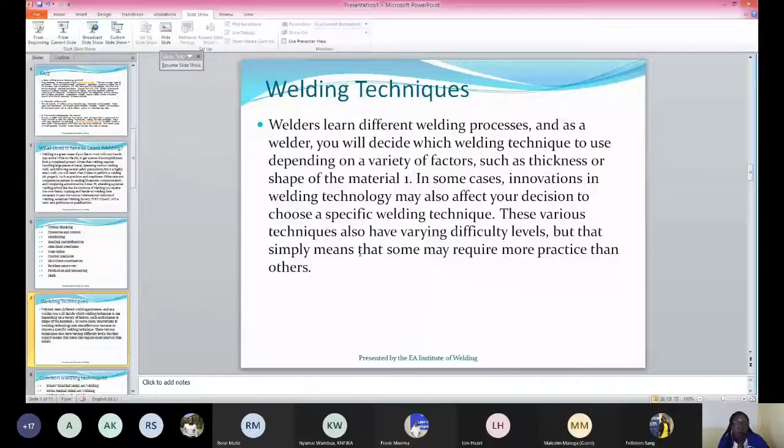The most common welding techniques are shielded metal arc welding, manual metal arc welding, metal inert gas welding, tungsten inert gas welding, high frequency TIG, and flux core welding, which is mostly used in arc welding, structural welding, pipe welding, aircraft welding, thin alloy welding, and pipeline welding.

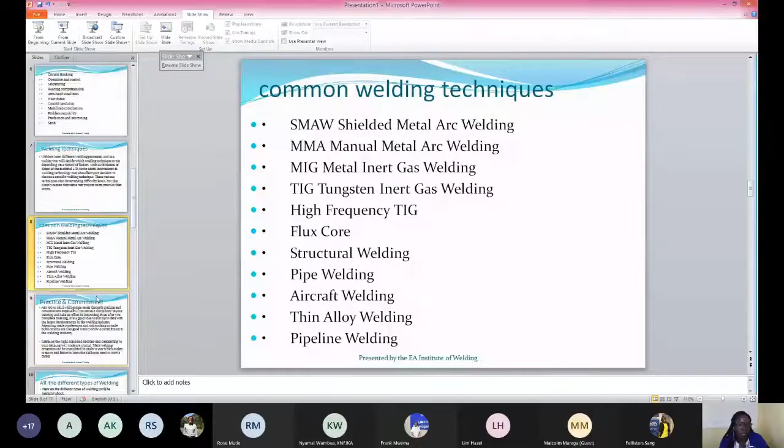To be able to do these common welding techniques, there needs to be some practice and commitment, because any job or skill will become easier through practice and commitment, especially if you remain disciplined in your training and take an effort in improving.

Even after completing training, it's a good idea to stay up to date with the latest developments in the welding industry - attending trade conferences, subscribing to trade publications, attending webinars like this one, and following industries that need welders are all good ways to show commitment to the welding industry.

Learning the right skills and abilities and committing to your training will make a crucial impact in your career. Many welding programs can be completed in under a year, which makes it easier and faster to learn the skills you need to start your career.

I would like us to look at all the different types of welding. I'll leave the PowerPoint presentation and take you to something else. These are the types of welding processes we're going to go through - there's more than one way to fuse a metal, so we're going to be looking at them.

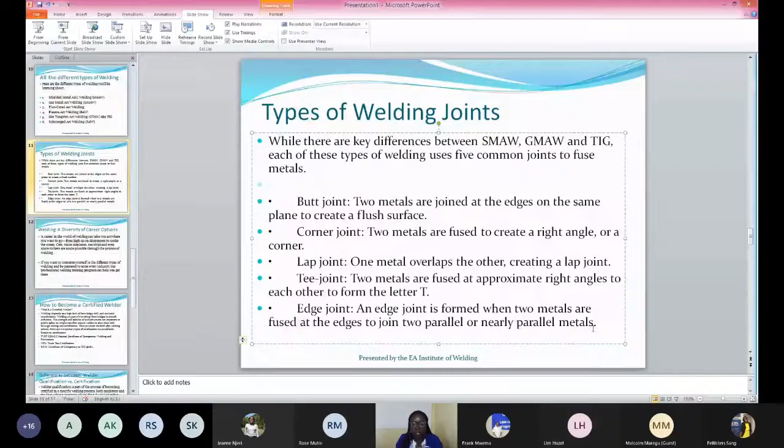We have the butt joint, where two metals are joined at the edges on the same plane to create a flush surface. We have the corner joint, where two metals are fused to create a right angle or corner angle. We have the lap joint, where one metal overlaps the other, creating a lap joint. Then there is a T-joint, where two metals are fused at approximate right angles to each other to form the letter T. And we have an edge joint, formed when two metals are fused to join parallel or nearly parallel metals. I will share an image of this shortly.

So these are the welding positions we're talking about, which will tell you about the different joints. We have fillet welds and groove welds. In a flat position, as you can see, this is how it looks: throat of the weld, which is vertical, and axis of the weld position. We have a horizontal position here, a vertical position, and an overhead position. As you can see, this is on a fillet weld, meaning it's on an angle. And all of these are the positions you have to weld in to be able to produce a fillet weld.

As the East African Institute of Welding, we ensure that before you reach position 4F, you have to start from position 1F on a fillet weld, a plate weld, or a butt weld. As you progress from 1F, it is assessed, and finally you can move to 2F, 3F, and 4F. Same way for groove welds, you start from 1G, 2G, 3G, 4G, and so on.

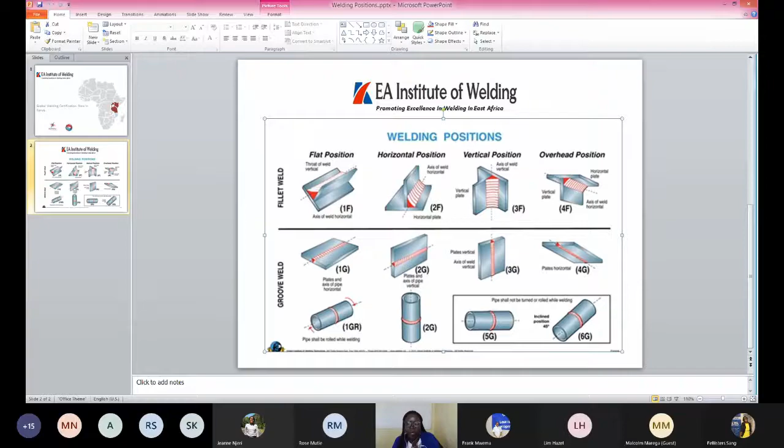We will go back now into the presentation I was focusing on before, and now we'll be talking about the differences between things, and first how to become a certified welder.

There's a diversity of career options that a welder has. A career in welding can take you anywhere you want to go, from the skyscrapers, building the Nairobi Expressway, or the tallest buildings in Africa, to under the ocean doing submerged welding, cars, trains, planes, sea ships, even space rockets if made possible. If you want to immerse yourself in the different types of welding, you have to be prepared to enter every industry, and this has to be done through a professional welding training program.

Sorry, I just noticed that I'm not sharing the screen.

So a diversity of career options, just as I said, that's what I was talking about. To attain all of this, you need to have gone through a professional welding training program to help you get there. And the way to get there is to become a certified welder.

How to become a certified welder. Maybe we can discuss what a certified welder is. Welding depends on a high level of skill and knowledge, and welding is a part of everything. The strength and stability of structures that welding creates are important to public safety, so employers often require welders to show their skill through testing and certification once you enter the field after welding school.

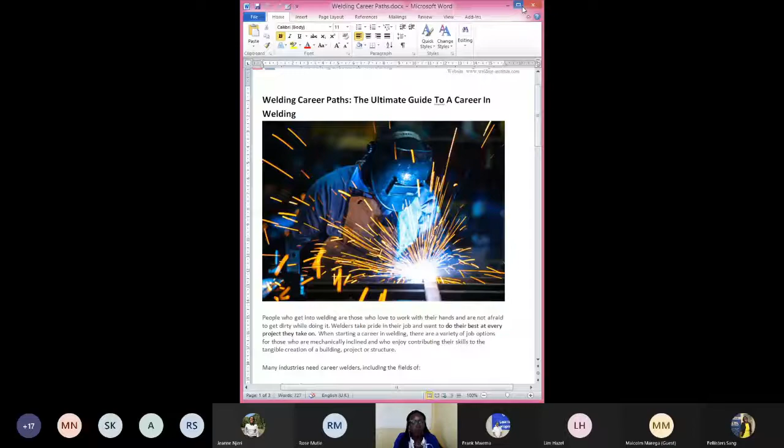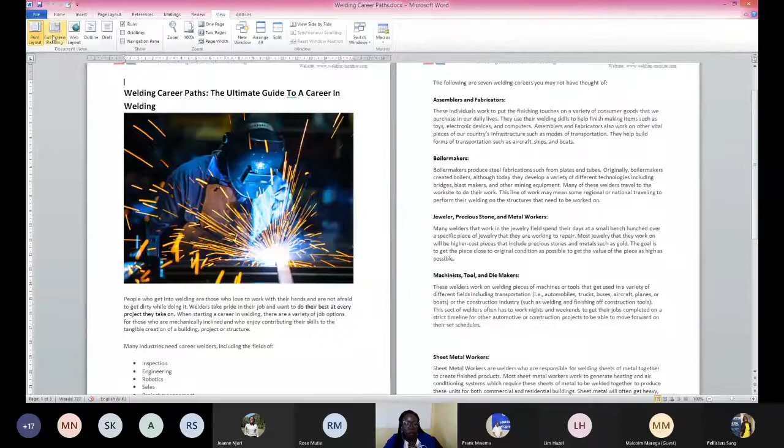Which is the welding career path. People who get into welding are those who love to work with their hands, as we spoke about, and are not afraid to get dirty while doing it. So welders take pride in their jobs and want to do their best at every project they take on. When starting a career in welding, there are a variety of job options for those who are mechanically inclined and who enjoy contributing their skills to the tangible creation of a building, project, or structure.

Many industries need career welders, including the fields of inspection, engineering, robotics, sales, project management, and education. The following are 7 careers you may not have thought of: assemblers and fabricators, boilermakers, jewelers, precious stone and metal workers, machinists, tool and die makers, sheet metal workers, plumbers, pipefitters and steamfitters, and metal and plastic machine workers.

I will go back to the first page and speak a little about each field. When we talk about inspection and how welders are needed there, let's take for example an oil tank, the ones lorries carry oil in and ferry to petrol stations. That tank has gone through a welding process before the oil is put in. Before it is put out on the road, there has to be an inspection and certification that it has reached the criteria to be safe for the job.

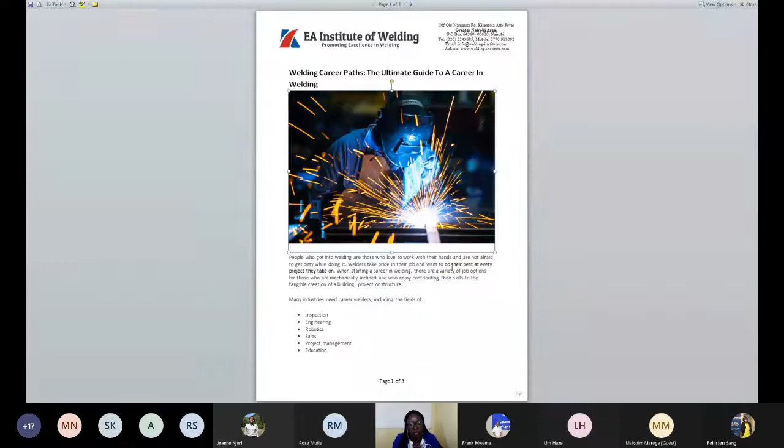We do have trainers who are welders, and after completing the welding training, they went ahead to learn how to be a competence-based trainer from the TVET CDACC level 5, and also through the Kenya Technical Trainers College to become a certified trainer. We have taken them on as instructors or trainers.

The several fields that I've mentioned here, we'll go back to them, which is assemblers and fabricators. These individuals work to put the finishing touches on a variety of consumer goods that we purchase in our daily lives. They use their welding skills to help finish making items such as toys, electronic devices, and computers, and the like.

We have boiler makers. I believe we all know what boiler makers are. They produce steel fabrications from plates and tubes. Original boiler makers created boilers, although today they develop a variety of different technologies, including bridges, blast makers, and other mining equipment. Many of these welders travel to the work site to do their work.

You will always find in some jobs where there is a work site, which is an advantage of being a welder, you have your minimum wage that you're paid, and the company also caters for the campsite where you'll be staying, the meals you'll be eating, you get medical insurance, and you also get transport to and fro. So these are the kind of contracts that we do get for our welders, and it is important, after we do prepare them for the workplace, because they'll be going to such areas, that they know the job has to be up to standard.

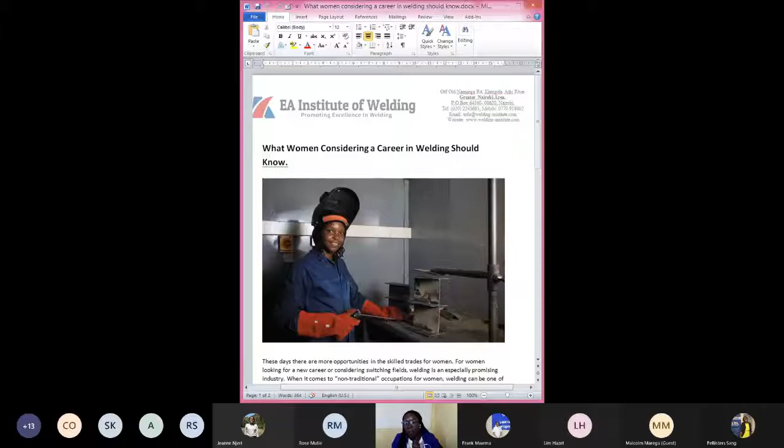I'd like to finally close off by looking at an important topic that's always asked: what women considering a career in welding should know. So there's a story I'd like to share. There's a picture here, I hope you're seeing my screen. The lady in that picture was our first welding trainer and head of our department at the institute.

Her career was in mechanical engineering, and she needed the practical know-how of a welder because she was considering becoming a trainer. She was the first welding trainer to international standards for the East Africa Institute of Welding, and being a woman, she really encouraged other women to also want to go into welding.

These days there are more opportunities in the skilled trades for women. For women looking for a new career or considering switching fields, welding is an especially promising industry when it comes to non-traditional occupations for women. Welding can be one of the most vital, in-demand, and rewarding of the skilled trades. So as you weigh your career options and consider pursuing professional welding training, there are a few facts you should know about the industry, and why it could be a positive move for you too.

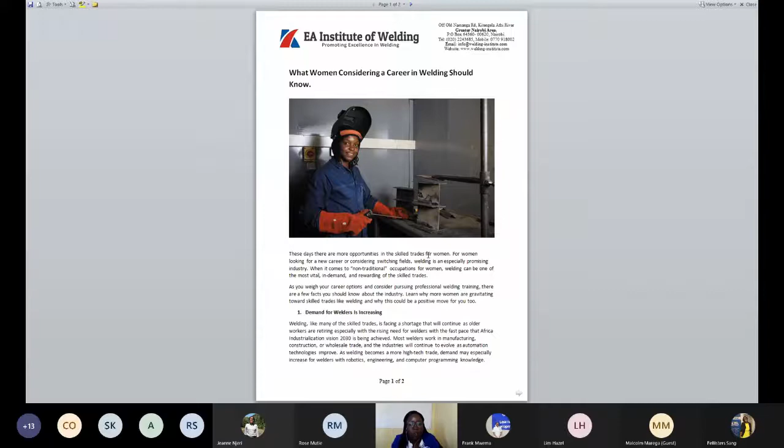Number one, the demand for welders is increasing quite fast. Welding, like many other skilled trades, is facing a shortage that will continue as older workers retire, especially with the rising needs for welders alongside Africa's Industrialization Vision 2030. Most welders work in manufacturing, construction, and wholesale trade, and these industries will continue to evolve as automation technologies improve. As welding becomes more high-tech, demand may especially increase for welders with robotics, engineering, and computer programming knowledge. So with this rapid growth and older workers retiring, there's high demand for welders. This is one thing to consider when choosing a career in welding.

Welding is also flexible and active. It can be an active job that offers flexible hours and travel opportunities. We have welding projects outside the country you can get involved in, and flexible hours. As a woman, I can say that if you need a period of maternity leave, as a welder you can take on a project of, say, 3 months, save your money, and take off a maternity break up to the point where you decide to take up more projects.

By registering with the East Africa Institute of Welding Institutional Dashboard in jobs, you always update your profile, and we know what jobs you have done, if you're available for a job at the moment or not, and we always make sure we link you with the jobs that are right for your experience.

The average salaries are relatively high. Welding and other skilled trades often have higher average salaries than most female-dominated careers. For example, a person working as a welder in Kenya typically earns around 45,800 per month, with salaries ranging from the lowest at 22,400 to 71,400 at the highest.